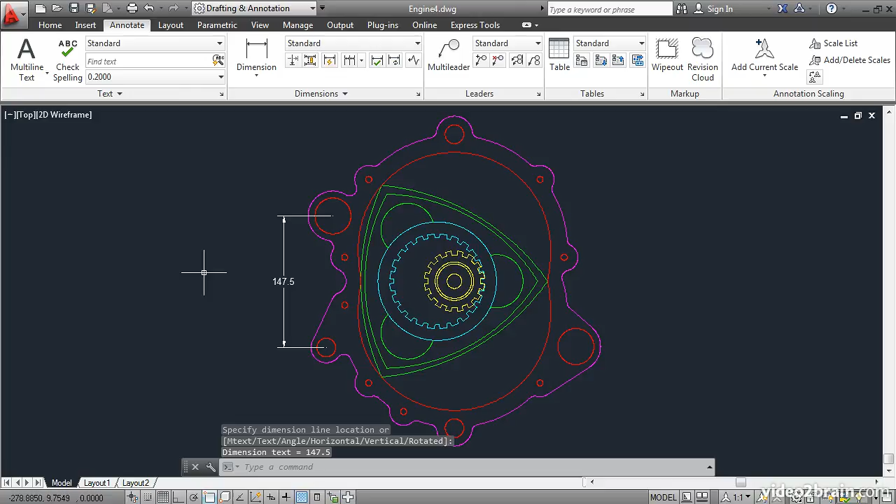Then snap to the center of this circle and click the center of this circle. Move the mouse over and click a third point to locate the dimension line. Repeat that command by pressing Enter. Acquire those same initial points by snapping to the centers of these two circles.

This time, instead of creating the same dimension over again, move the mouse up. Click a point to locate this dimension line. So the direction that you drag the cursor determines whether you create a vertical or horizontal linear dimension.

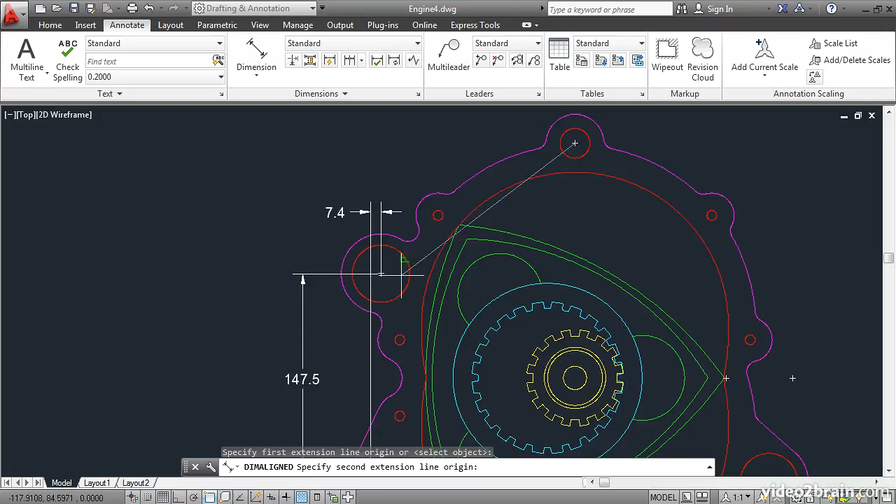Open this flyout and choose Aligned. Aligned dimensions are used in situations where you want to measure a linear dimension that's on an angle. It's neither horizontal nor vertical. Click the center here and the center here. And then click a point up here somewhere to locate the dimension line.

Open the flyout and try Angular. Angular dimensions can be measured between two lines, or you can click a circle or an arc. Click this arc, and then click some point above it to locate the dimension line.

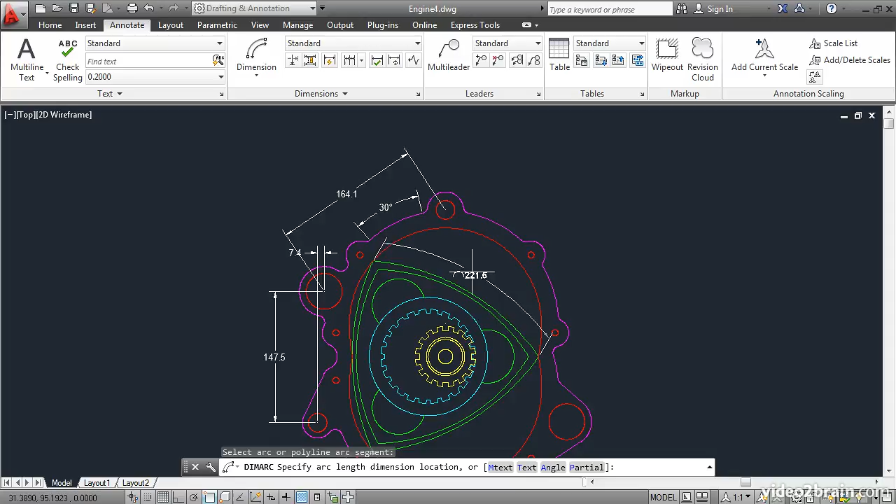Open the flyout and try Arc Length next. Click on this green arc, and then click a point above it. Arc length dimensions have an arc symbol, and notice that the dimension line is curved to help you visually key into the fact that this is not a linear dimension.

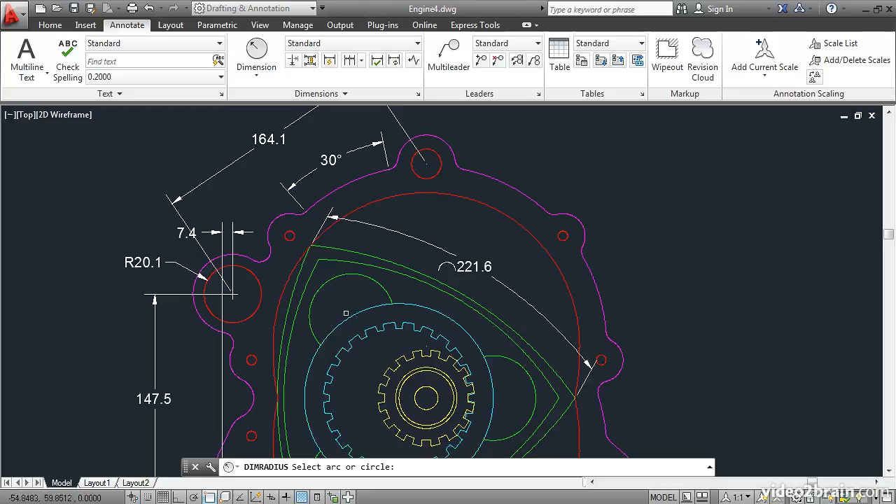Next, let's try a radius dimension. It works the same way as diameter. Click a circle, and then click a point either inside or outside the circle, depending on how large it is, to locate the radius value. Let's try that again. Click this cyan circle and click inside somewhere to locate the radius value.

Go back up to the flyout and let's create another linear dimension. This time we'll go from the center of this large circle to the center of this circle. Move the mouse up and click a point.

We could do that again over here, but there's a specialized command that can help simplify this process. It's located right here on this flyout. And there are two of these commands, Continue and Baseline. They both require a base dimension to be created just prior to using either of these commands.

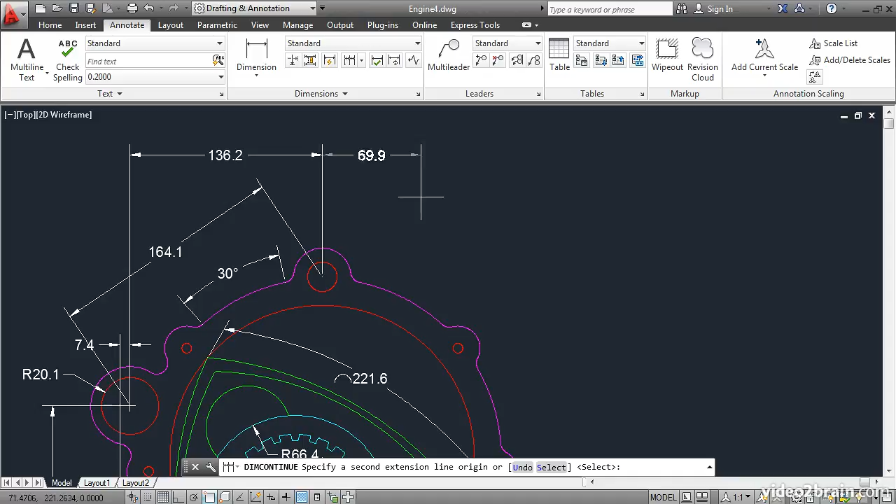Click Continue, and you can see what's happening here. I'm continuing from where I left off. I'll click right here, and it creates another linear dimension. I'll pan down and click at the center of this circle, and then go down here and click the center of this circle. Press Enter to finish the command.

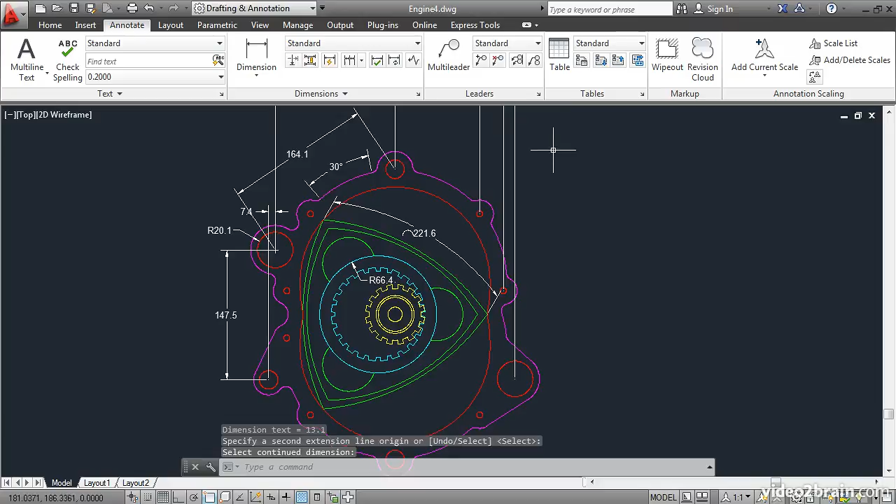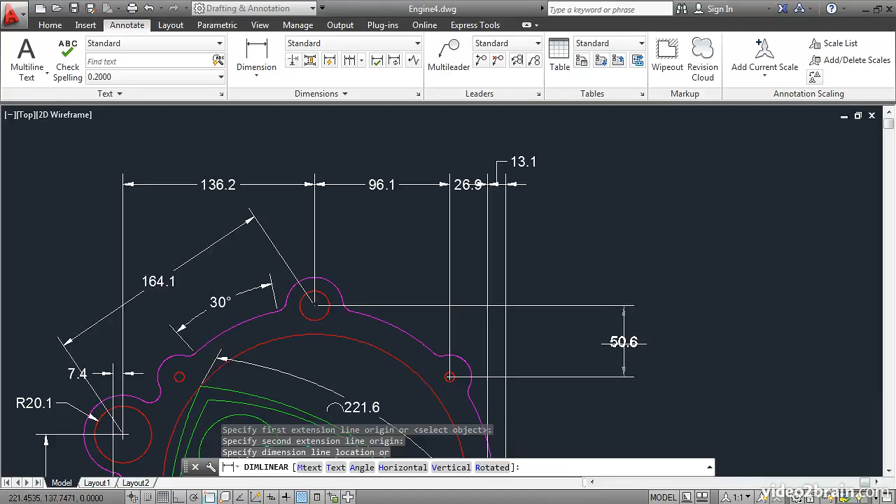Let's try that again using a linear dimension at first, and this time we'll dimension the vertical direction. I'll snap to this center point, and then I'll snap to this center point, and then move the mouse to the right to indicate that I want to dimension this vertical linear distance. Click a point, and then go ahead and use the baseline command.

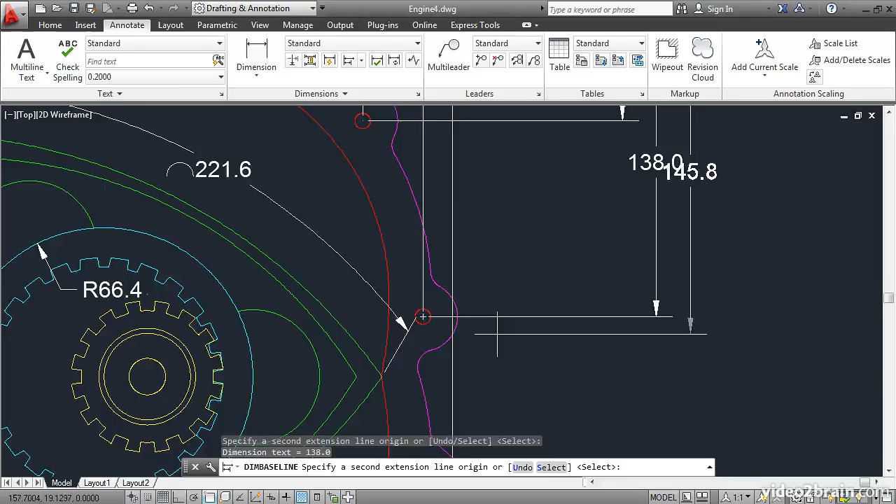It also picks up from where I left off, but it works in a slightly different way. I'll zoom in here and snap to the center of this circle, and then I'll go down here and snap to the center of this circle, and press Enter, Enter. The baseline dimensions all reference this same baseline, whereas the continue dimensions continue to create a chain of dimensions.

So to summarize, you have created many different types of dimensions by carefully snapping to geometric features and then clicking the locations of the dimension line where the numerical value is shown.